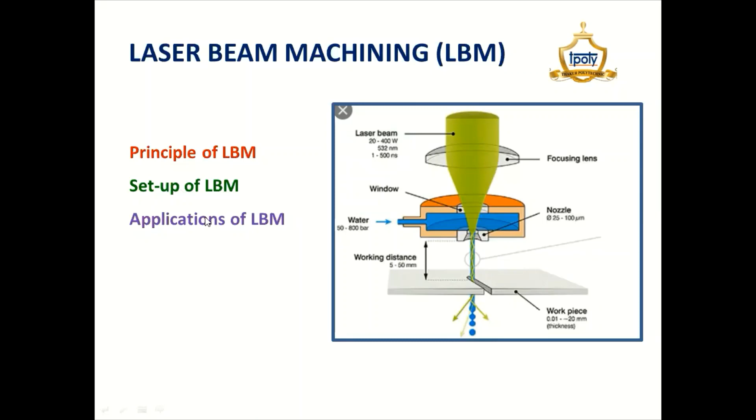Hello friends, today we are going to see the non-conventional machining process, that is the laser beam machining, which is also called LBM. In that we will cover the following topics: principle of LBM, setup of LBM and application of LBM.

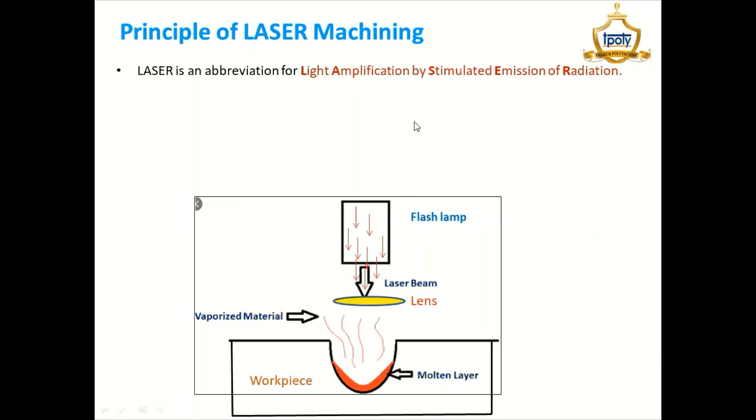Principle of laser machining. So laser is the abbreviation for light amplification by stimulated emission of radiation. Now it works on the principle of conversion of electrical energy of the flash lamp into heat to emit a laser beam by pumping the energy. So here we are using the flash lamp, and due to that reason the light will get emitted and it will focus on the workpiece for removal of the metal.

But how is it possible? You can see here. Now this laser beam is just focused by a lens. So why is it focused by the lens? So that you can give the high energy in concentrated form, and it will help to melt the workpiece and vaporize the material from the workpiece. So this is the basic principle of the laser beam machining process.

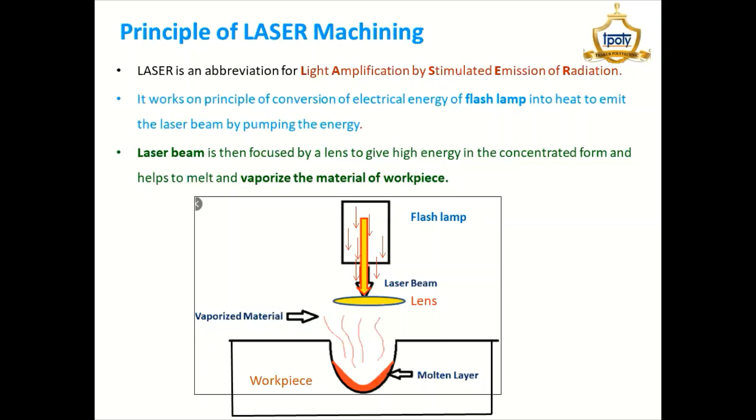Then setup of laser beam machining. So here in the setup, we'll see the different parts. Ruby rod with a reflecting mirror. Second is a flash lamp. Third is the cooling arrangement. Fourth is the lens. And the fifth is the power supply unit. So we'll go into more detail.

First is the ruby rod with a reflecting mirror. So in this diagram, we can see the ruby rod is just like a cylindrical rod having a diameter around 10 mm, and the length of this ruby rod is around 100 mm. And this ruby rod is made up of aluminum oxide along with chromium. The chromium percentage is very less. Actually, just 0.05% gets added to the aluminum oxide.

Now, in the ruby rod, on one end it is a completely reflective end, and the other one is the partial reflective mirror. So why is the partial reflective mirror given there? Because it allows the beam to pass through this end, right? So for that, it is a partial reflective mirror.

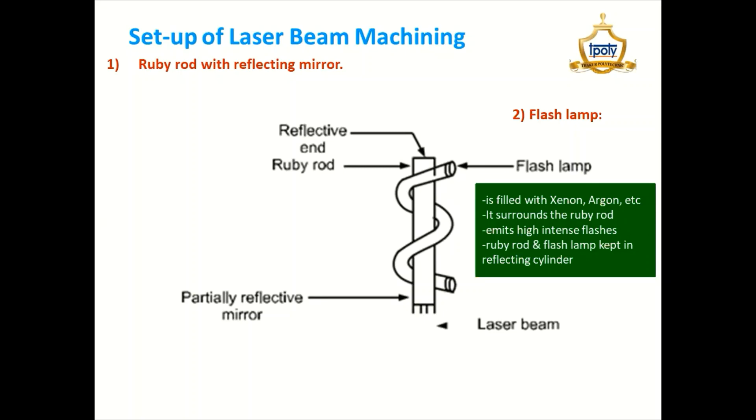So this is the actual sketch of the ruby rod. Now this pink color is the ruby rod, which is cylindrical, right? And you can see this is a flash lamp, right? So we are just mounting the flash lamp around the ruby rod. So this is the actual sketch of the ruby rod. One end is where we can say it is partially reflective, and this is reflective.

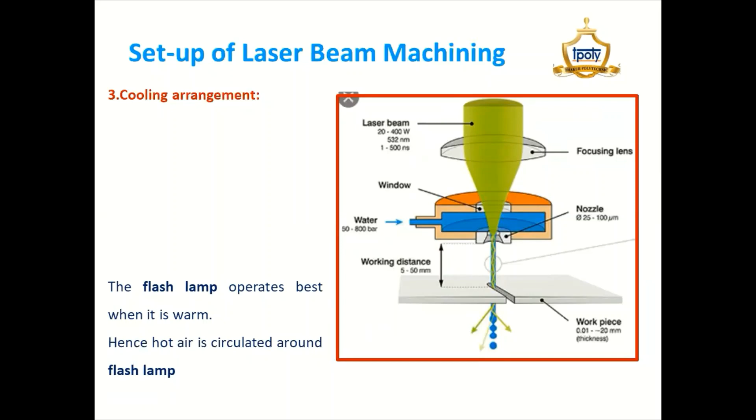Then you know that the flash lamp is mounted over the ruby rod, but this flash lamp is operated when it is warm, right? So to keep it warm, hot air is circulated around the flash lamp, right? So this is why the cooling arrangement is required. Ultimately the efficiency increases if you use the proper cooling arrangement.

Then the lens. We can pass the laser beam through this lens onto the workpiece, and due to that the melting will take place. For that reason we can increase the intensity, and we can focus it properly at one point on the workpiece.

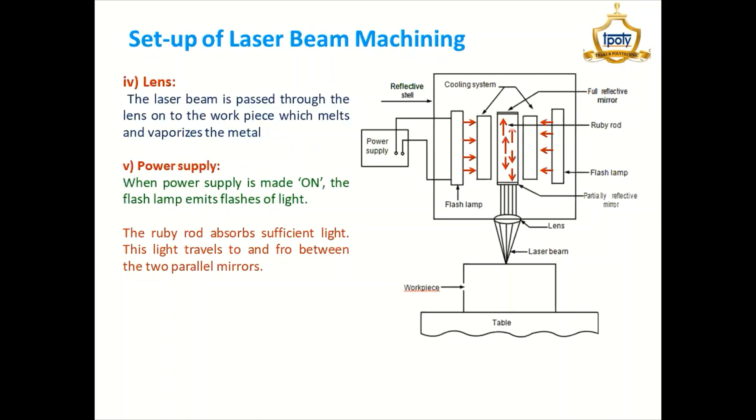Now, in the power supply, when we switch on the power supply, the flash lamp emits light, you can see here. It will continuously flash over the ruby rod, right? The ruby rod will absorb that light, and due to this, the light will travel to and fro between the two parallel mirrors. Two parallel mirrors means one at the top and the other one at the bottom. So in this way this light will travel inside the ruby rod.

Now this amplified stream of light comes out through the partially transparent mirror and is focused on the lens. You can see it comes out through the partially reflective mirror, and then it is focused on the lens. When we focus it through the lens over the workpiece, melting of the workpiece will take place and it vaporizes the metal. So this is a simple process of laser beam machining.

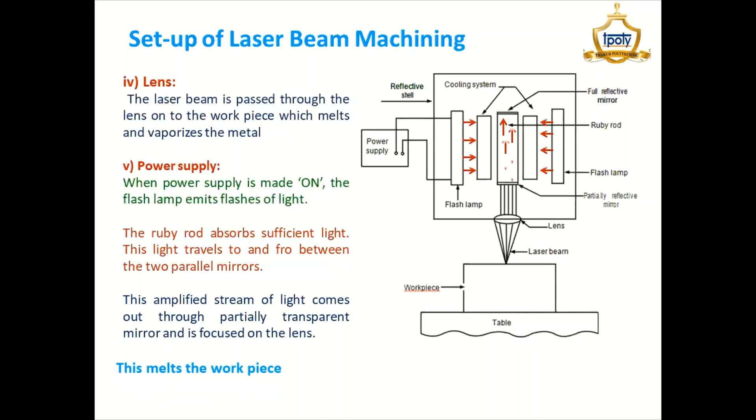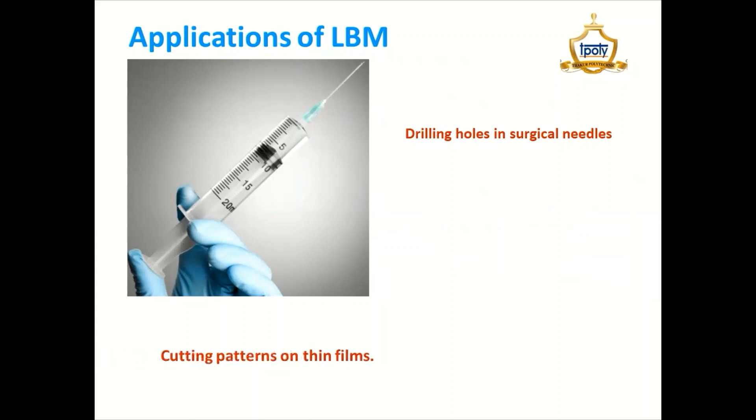Now as far as applications are concerned, you can see drilling holes in surgical needles. Here I have shown one diagram. This is a needle, and you know that in the needle there are very small fine holes, and this is possible in LBM. Then cutting patterns on thin film: if you want to make any texture on it, it is possible. I have shown one sketch of that. So different textures are possible.

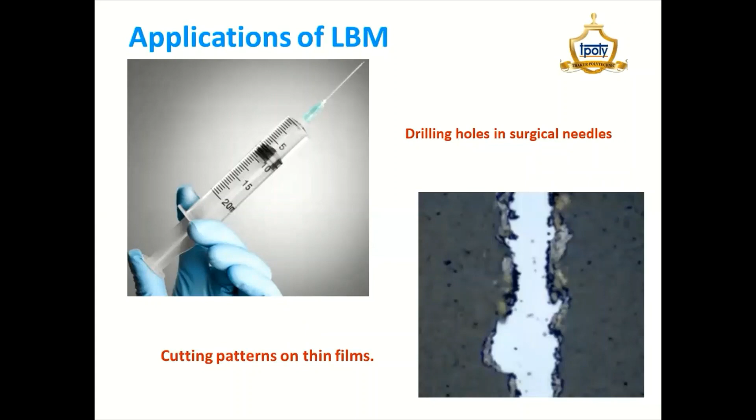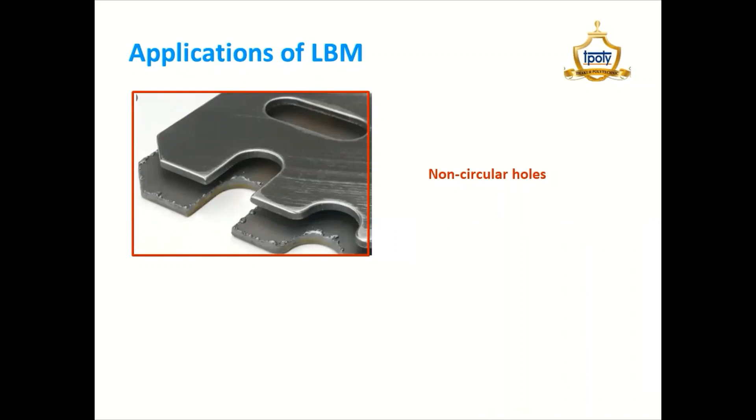Then non-circular holes are also possible. You can see I have shown this diagram, some hole slots are there. Means other than circular, it is possible with the laser beam. But in this case, we have to use the aid of CNC, so that we can control the workpiece and get the desired shape we require. Then cutting of sheet metal, which I have also shown in the sketch, where a cutting operation has taken place. Square holes. So different types of shapes we can cut by using LBM.

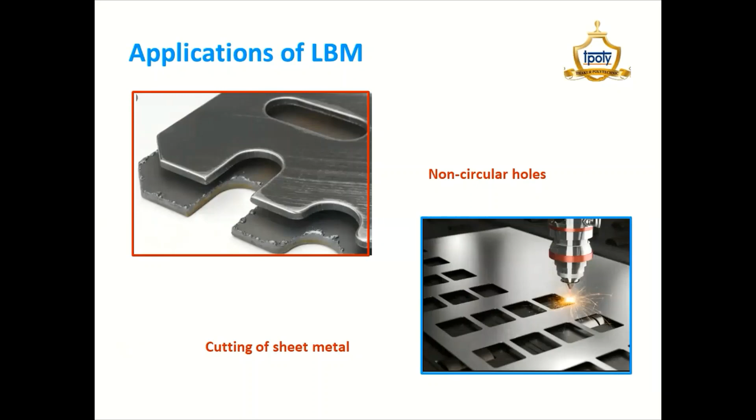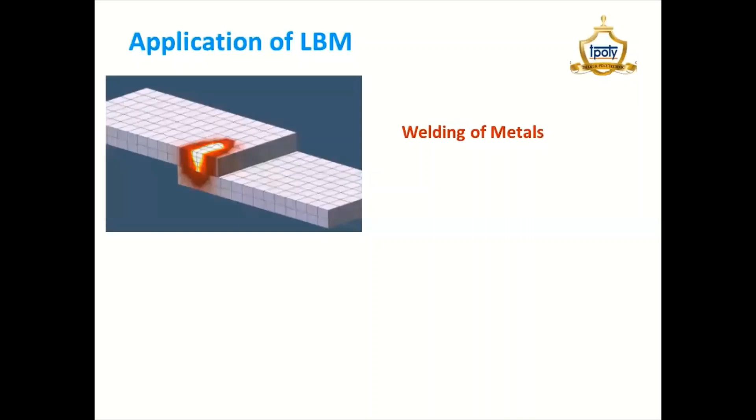Then welding of metal. You know that the laser beam is mostly used for welding purposes. This is the best. I have shown that two plates can be welded by laser beam machining. Then light shows. We can use the laser beam in light shows also. You know this very well.